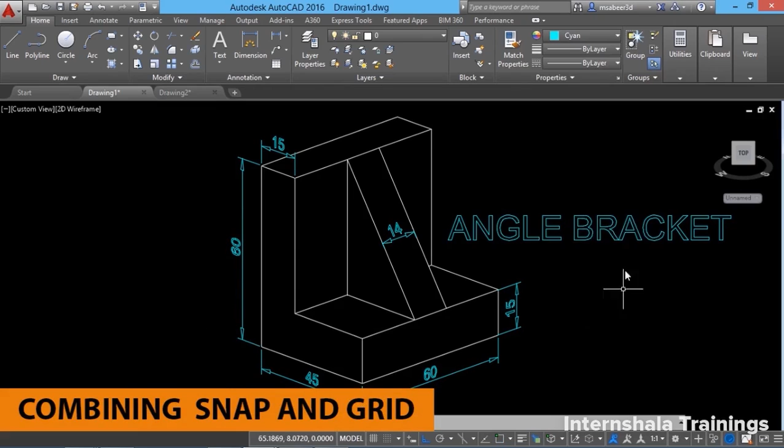I would like to create a front elevation of this angle bracket. When you look at the dimensions, most of the values are multiples of 15. I am going to make use of the snap and grid mode to create the front elevation. Though this method is not very commonly used, I would like to just give an idea about this concept.

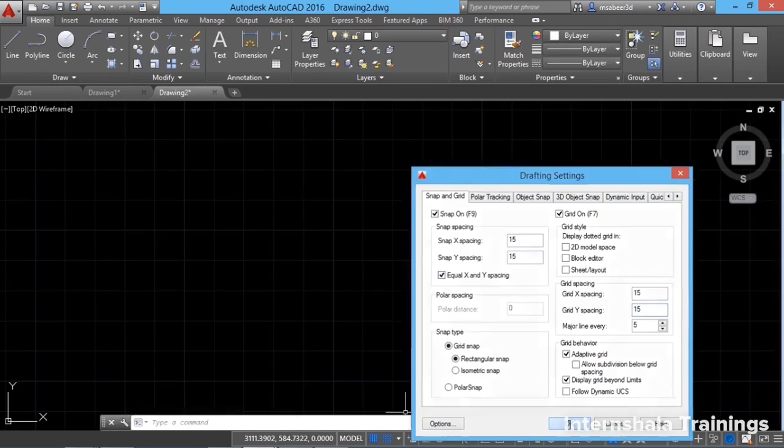I'll right click and go to grid settings, and I'll change the values of snap and grid spacing to 15. When you change the value in the X direction, the value in the Y direction will also get changed. Just give OK. Now I'll go to line command and plot this 60, then 45, then 15, 30, all the way up till this point and close it.

I'll go to line command. I'll start from this point. 1, 2, 3, 4. That means it's 60. My cursor has snapped at an increment of 15, 4 times. So I have plotted 60 units.

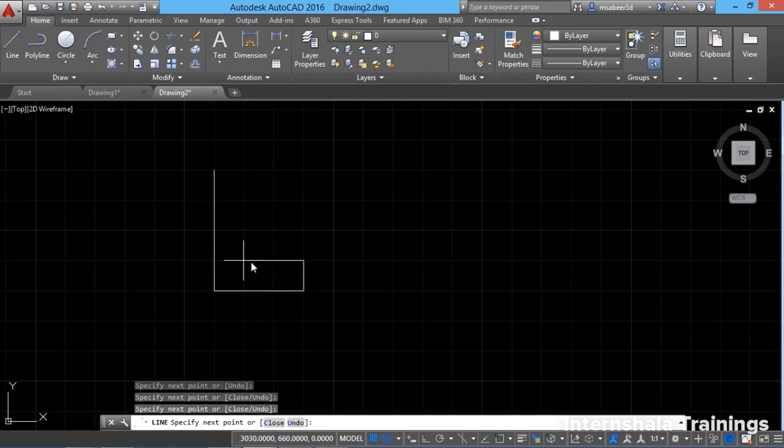Similarly, 1, 2, 3, it's 45, then 15. This is 30, and you can come all the way up till this point, and you can come back to this point. Just give an enter. Then give one more line command. You can draw a line connecting this endpoint and this endpoint. This is how the front view of this figure will appear.

In a way, this method is easy, but since you are already familiar with better methods, you can stick to those methods. I'll turn off the grid as well as the snap buttons at the status bar.

Next, I'll introduce you to the concept of object snapping or O-snap in AutoCAD. I'll start with a line by picking 2 points. I would like to draw another line from the end point of this line. So I'll just give enter to repeat the line command, and I'll just pick a point here, pick the next point here. When you look at this intersection, you might feel that it is perfectly accurate.

But according to AutoCAD, this is wrong. Just zoom in this area and find out yourself. This is the inaccuracy. From this, it's clear that picking a point in AutoCAD using the mouse is not recommended. I'll erase this line. So how will you pick this endpoint?

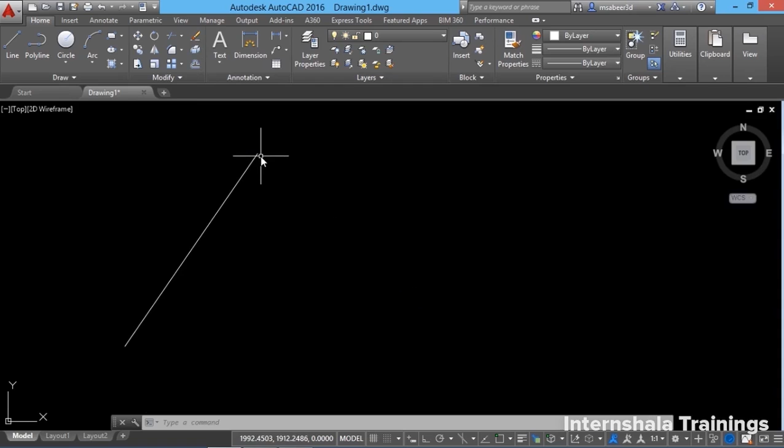In AutoCAD, we have already discussed the methods to define new points, like absolute or relative polar coordinates in the last tutorial. But if you want to pick precise or qualified points on existing objects, you should always make use of object snapping or O-snap. So what is O-snap? O-snap is a method in AutoCAD using which you pick qualified points on objects. What is meant by qualified points?

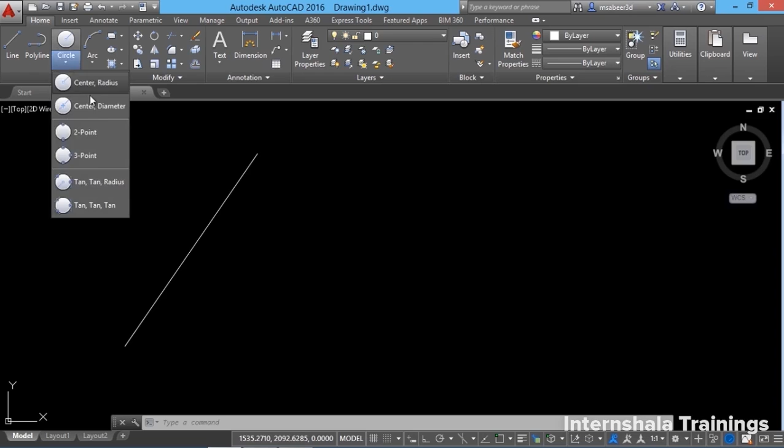I'll draw a circle here with center radius method, then give enter, one more circle here. Qualified points are those points which are unique points. Take a line, for example. How many qualified points can you show me in a line? A line has got a start point, end point, and a midpoint. You cannot find 2 midpoints because it's a unique point. Same is the case with start and end points.

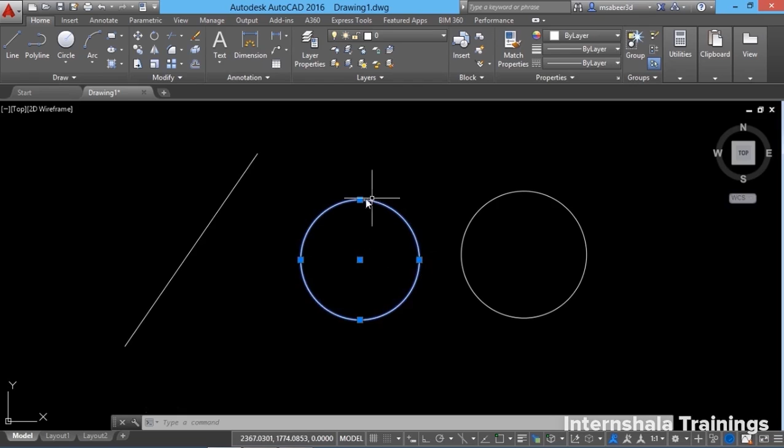If you take a circle, how many qualified points can you show me in a circle? A circle has got a center point and 4 quadrants. You have a 0th quadrant point, 90th, 180th, and 270th quadrant points.

Let me draw an arc using the 3-point method, and I'll try to locate the qualified points in it. When you click here, you can see that it has got a start point, end point, a midpoint, and a center point. A circle do not have a midpoint, but an arc has got a midpoint. Likewise, the qualified points varies from object to object.

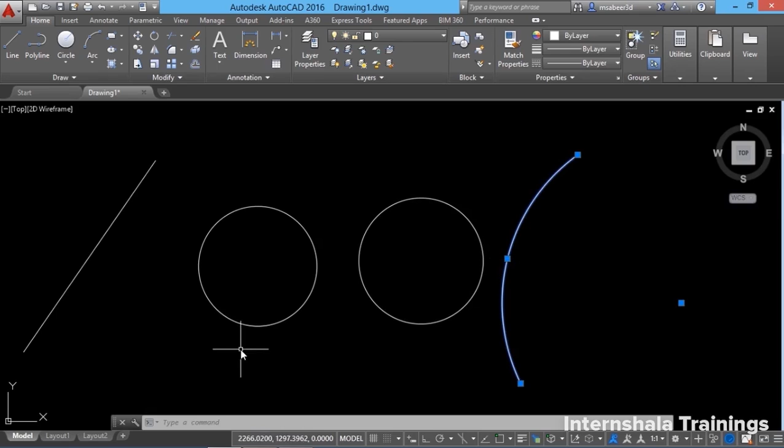Whenever you want to snap onto these points, you should always make use of object snapping. O-snap works in 3 different modes. One is called normal mode, then we have running mode and override mode. Let's explore these 3 modes in detail.

So what is normal mode? Make sure that O-snap button is off. Now I would like to draw a line exactly from the endpoint of this line. So what I'll do is hold down the shift key of the keyboard and click the right button of the mouse to get this particular button menu.

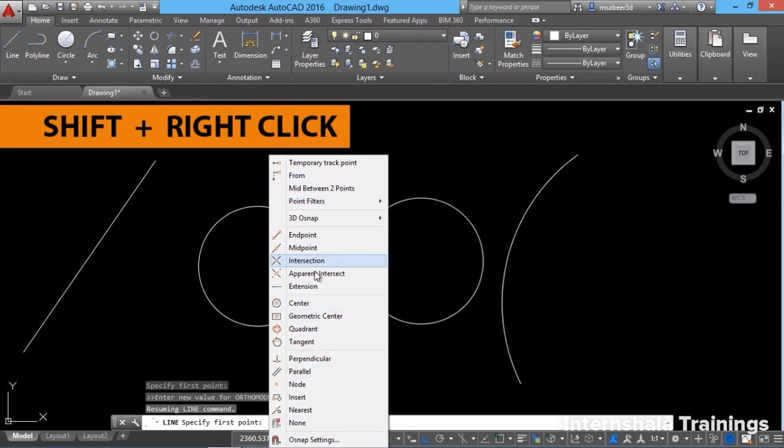In here, you can see the list of all those qualified points. Suppose if you want to take an endpoint, just click on endpoint. You will get a square symbol indicating that it's an endpoint. You will also get a tooltip to confirm it. I'll just escape to cancel.

I repeat the line command, shift right click, and I'll select endpoint. You don't have to precisely place it on this endpoint, but you can keep anywhere near this endpoint. But if you keep your cursor here, this particular endpoint is identified. But if you keep it here, the other endpoint is identified.

Depending upon the location of the cursor, that corresponding endpoint is identified. Now I'll just click a point here.

Now I would like to draw a tangent to this circle. So shift right click, you can take tangent, and I'll keep the cursor on the periphery of the circle, and it has got the tangent. You can also access the OSNAP in normal mode by inputting the first three letters using the keyboard.

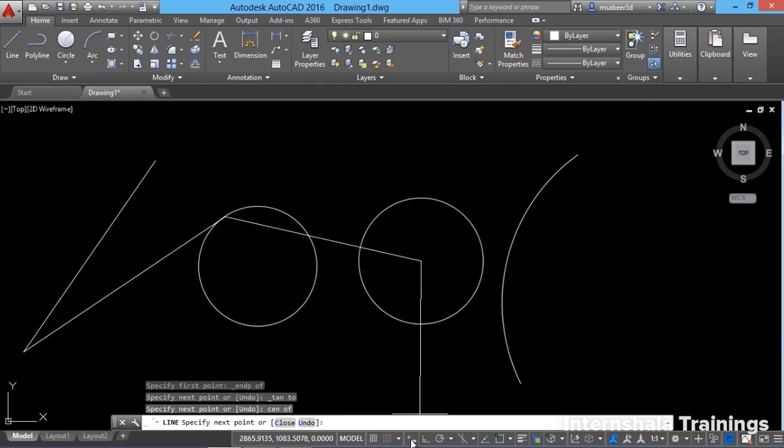Suppose if you want to draw a line to the center of the circle, you can type CEN for center. Now it has got the center point. Suppose if you want to draw a line to the midpoint of this arc, you can type MID. And if the dynamic mode is on, this will appear at the cursor location. And you can type MID. Now it has identified the mid.

I'll turn off the dynamic mode. And this is called the normal mode of object snapping. So in this mode, whenever you want to pick a point, just shift right click and you can select the desired qualified point from here. But this will become inconvenient whenever you want to pick a particular point repetitively. For example, the end point, midpoint and center points you may have to use several times in a drawing.

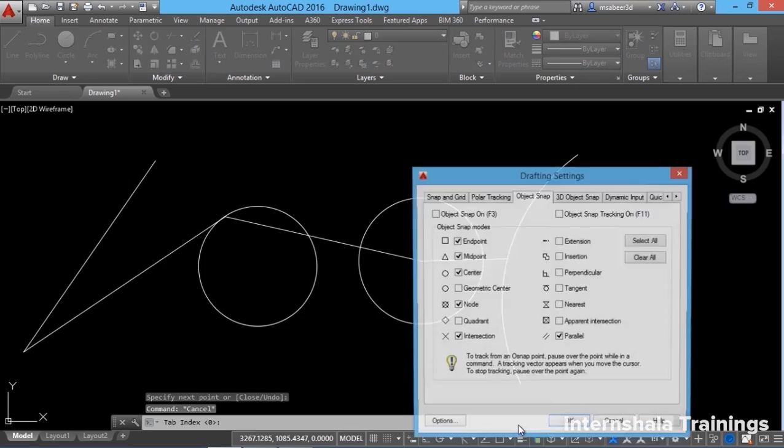So such items can be permanently attached to the cursor by activating those items here. I'll activate endpoint, midpoint, center point and all those frequently used items. This can be activated either by clicking on this arrow, or you can just right click over here, go to Object Snap Settings and you will get Drafting Settings dialog. Here you can activate those frequently used items and just give OK.

Now just enable or activate the OSNAP button. This can also be activated using the F3 function key. Suppose if I want to draw another line from the endpoint of this line, it will automatically go and catch that endpoint. You can draw with the center to this center, and when I take the cursor here, this particular point satisfies three conditions. There is a center, it is an endpoint as well as an intersection. In such a situation, software takes the best decision.

Hence, in running mode, you activate all those items which are frequently used in the OSNAP menu, and once those items are activated, those items will get permanently attached to the cursor, and whenever you want, you will be able to make use of those items.

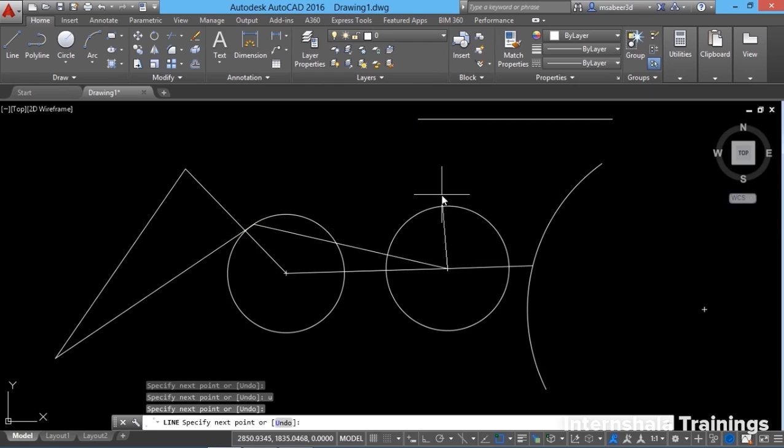Now let's see the override mode. In override mode, you temporarily override a running mode to use most infrequently used items in OSNAP. I'll demonstrate it with an example.

In OSNAP, we have an item called nearest. So the nearest option, when activated, it will take a closest point, not the qualified point. That means if I take the cursor onto this arc, it will snap onto the nearest point. I can snap onto this point, or I can snap onto this point. If I want to catch on to this endpoint, then only if my cursor is precisely at this endpoint, I'll get it. But the moment I move away from the endpoint, the nearest option takes precedence.

Suppose if I want to snap onto the quadrant point here, I'll activate quadrant. Only if my cursor is exactly on the top of a quadrant, it will identify it. The moment you move away from the quadrant, the nearest will take precedence. From this, it's clear that the nearest snap should not be used as a running mode.

The solution is to use nearest snap in override mode, which is obtained by shift right clicking the mouse and choose nearest. Alternatively, you can also type NEA for nearest. Now I have only the nearest OSNAP item attached to the cursor. The rest of the items are disabled. No endpoint, no midpoint, nothing.

Suppose I want to draw a line to a nearest point here. Just make a click here. Now the nearest is used. That means you are temporarily overriding the existing running OSNAP. Once the override mode is used, you will come back to the running mode. Now I am back to my running mode.

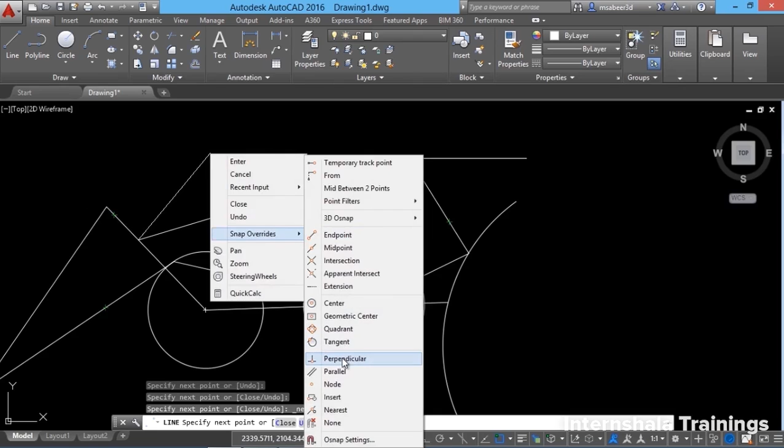You can also access the override mode by right clicking, and here you have a snap override. For example, I need perpendicular. Perpendicular is not permanently attached. I need perpendicular and I want to draw a perpendicular to this line. So you can take the cursor onto this line and make a click. Now it's a perfect perpendicular to this line. So that's all about override mode.

So just to refresh, how will you access the override mode? When you are in the running mode, when you have a number of items which are permanently attached to the cursor, and if you want to use an item which is not frequently used, all you have to do is hold down the shift key and the right button of the mouse to get this button menu, and you can access any desired item from here on top of a running mode. Once you take an item, your cursor will have only that particular item attached.

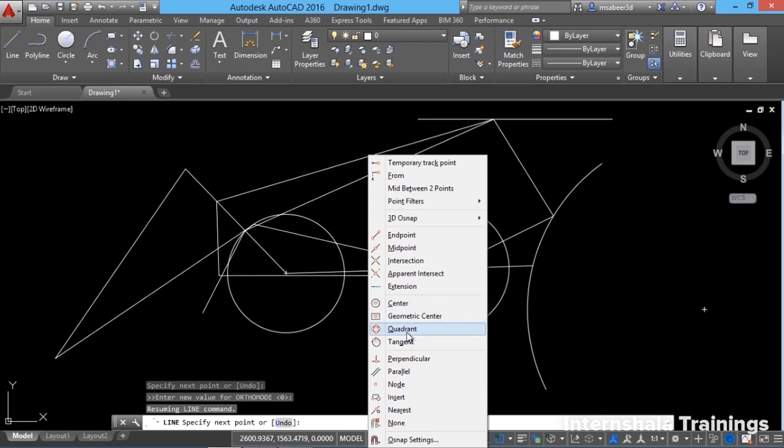Once you use an override mode, you will come back to the running mode. There is also another method to use it: simply right click the mouse and you will get Snap Overrides, giving you the same items from this menu. Now let's quickly go through all the items in the OSNAP menu.

You're already familiar with endpoint, midpoint and center. Center is normally used to snap onto the center point of a circle, arc or ellipse. But what about geometric center? This is a new feature introduced in the 2016 version of AutoCAD.

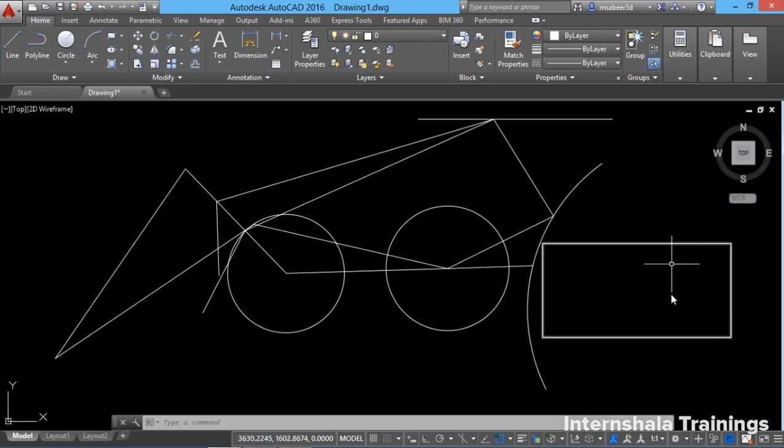I'll demonstrate it. Let me create a rectangle using the rectangle command in the draw panel, clicking the first corner and the opposite corner to define it. Now I would like to construct a circle right at the geometrical center of this rectangle, without drawing construction lines. We used to make use of some other methods in previous releases of AutoCAD, but now we have geometric center.

So I'll click on the circle command and take the center radius option. The moment you bring the cursor onto the rectangle, the geometric center is identified. This particular symbol represents the geometric center. Then just click there, the center is identified, and you can drag to specify the radius.

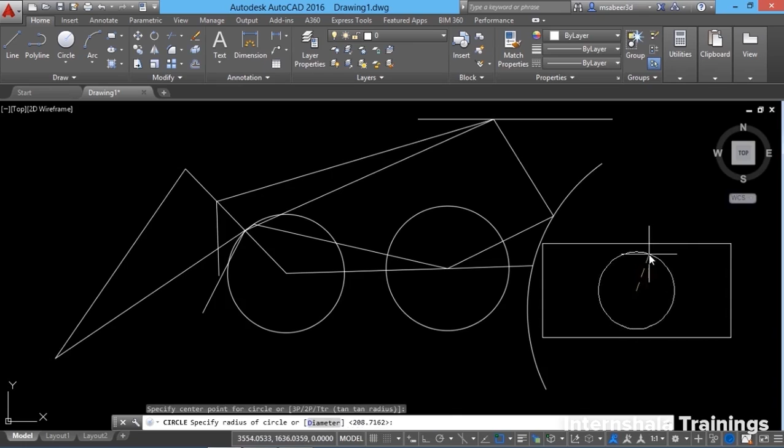The same option can be used to get the geometric center, which we call the centroid, of any irregular shape. There is a command called polyline in AutoCAD. We'll discuss this command in detail in some other video.

I'll pick a number of points to create this polyline. The polyline can also be made up of arc segments. So right click and go to the arc option, make an arc, then one more arc here, then I'll come back to line and connect with this.

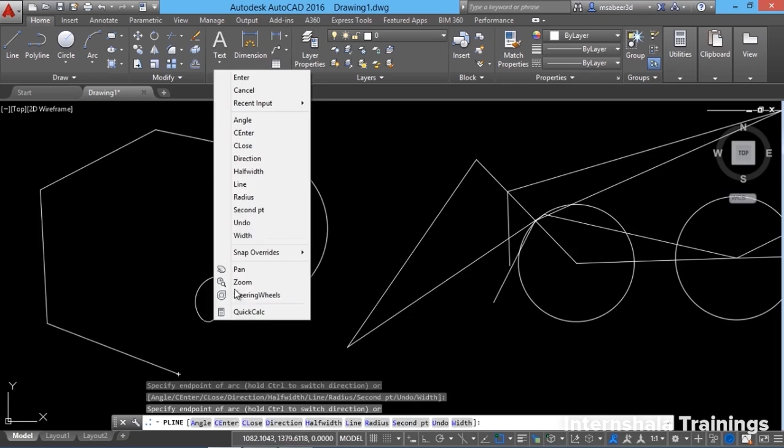Suppose I want to get the geometric center of this particular irregular shape and plot a point there. So you can go to the draw panel and use an option called multiple points, which is nothing but the point object you learned in the last video. Click on the point and just make a click there, then give an enter to go out of this command.

You can go to DDPTYPE and change the point display type. I'll give this particular representation for the point. Now you have plotted a point.

The next option is the node option. When the node is active, you will be able to snap onto a point object, which is plotted either by using the point command or obtained through some other commands, which we'll see later. Now I would like to draw a line from the node. Even if the geometric center is turned off, you can exactly snap onto this node. Now the node is working. Click on it and I'll connect it with the center.

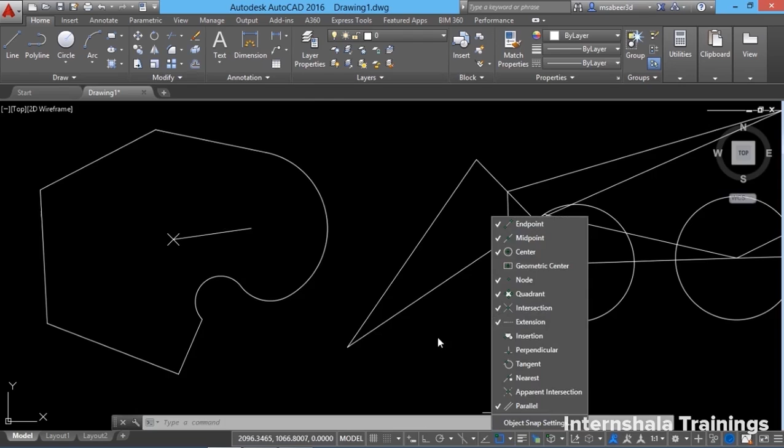Next we will see the extension snap. I'll activate the extension snap and erase this object. I'll draw a line from here, activate ortho and pick the endpoint here. Then I'll draw an arc, a 3-point arc, 1, 2, 3.

I'll give the line command again and keep the cursor onto this endpoint. When I move the mouse, you are moving along the extension of that line. This will eliminate the requirement of drawing construction lines, and if you pick a point, you'll be picking exactly on the extension of this line.

You can also try it on the arc. When you keep the cursor on this arc and move it, you can see that you are moving along the extension of that arc. I'll keep the cursor over here. You should not pick, but instead just bring the cursor onto this endpoint and move the mouse.

You will also get the point of intersection. This is actually the intersection of these two objects when produced. So that is the main advantage of using the extension snap.

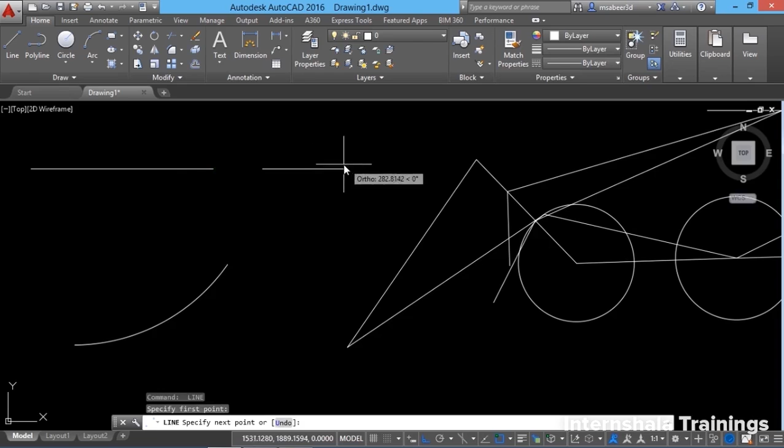The insertion snap will let you precisely snap onto the insertion point of a block. When we discuss the concept of blocks, we will cover this part. Then perpendicular we have already seen, tangent we have discussed, nearest was also covered. Then apparent intersection is basically used to get the intersection of two objects which are in two planes in 3 dimensions, so this has got application only in 3D.

Parallel is basically used to create parallel lines with respect to a line. To create parallel lines in AutoCAD, we make use of a command called offset, so this particular snap item is very rarely used. That's all about the OSNAP.

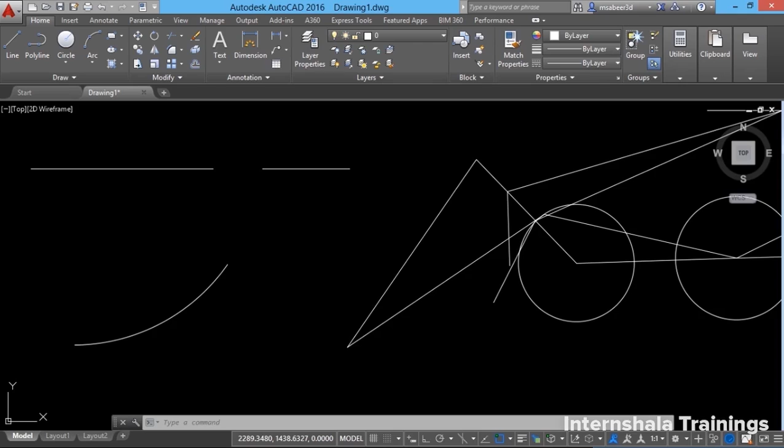One very important point to be memorized is you're supposed to use an OSNAP item only when you are asked for a point. In the next video, we will continue with the same topic of various methods to achieve precision in AutoCAD software. There we will see the concept of user coordinate system, tracking, point filters, and some more options in the OSNAP menu.